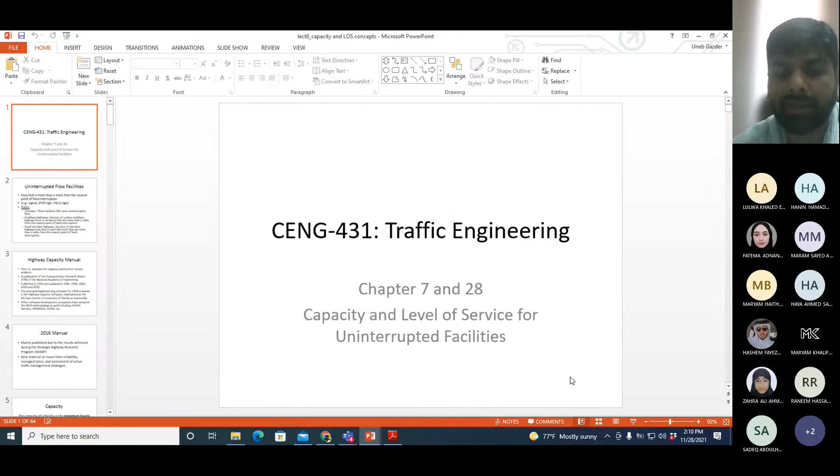Now I will move on to the topic for today, which is capacity and level of service for uninterrupted flow facilities. And this topic is taken from chapter 7 and chapter 28. So we have already defined uninterrupted flow facilities, right? The facilities which do not have fixed interruptions like signals, stop signs, yield signs, and many others as well. Now, if a facility does not have interruptions, you can call it an uninterrupted flow facility without any problem, without any explanation.

But for the purpose of calculations of capacity and level of service, we have imposed a small restriction on this definition. And that restriction is that if the spacing between the interruptions on a facility is more than 2 miles, you can still call it an uninterrupted flow facility. So a highway may have interruptions and may still be called an uninterrupted flow facility, provided the spacing between the interruptions is more than 2 miles. So if signals are more than 2 miles apart, or a signal and the next roundabout are more than 2 miles apart, you can still call it an uninterrupted flow facility.

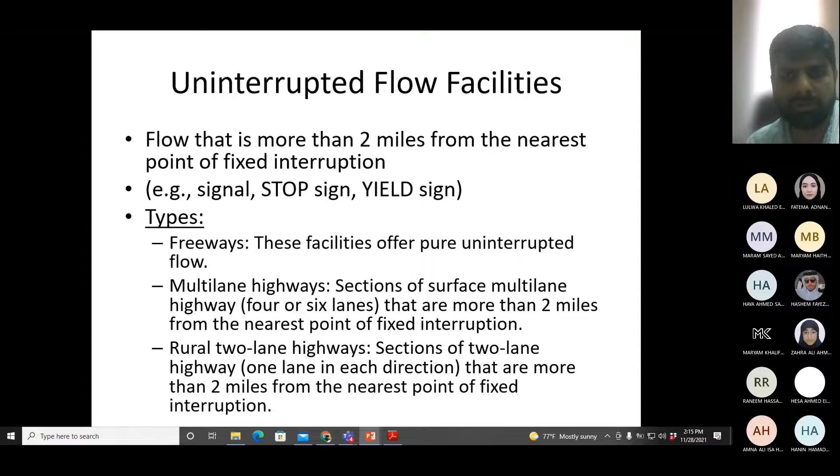But if you come to rural areas, they do not have much population around them. So by default, their traffic is low. So you may have a 2-lane highway in a rural area which is passing through a low population locality, and 2 lanes are enough for them. So even if you make them uninterrupted, they can still be safe.

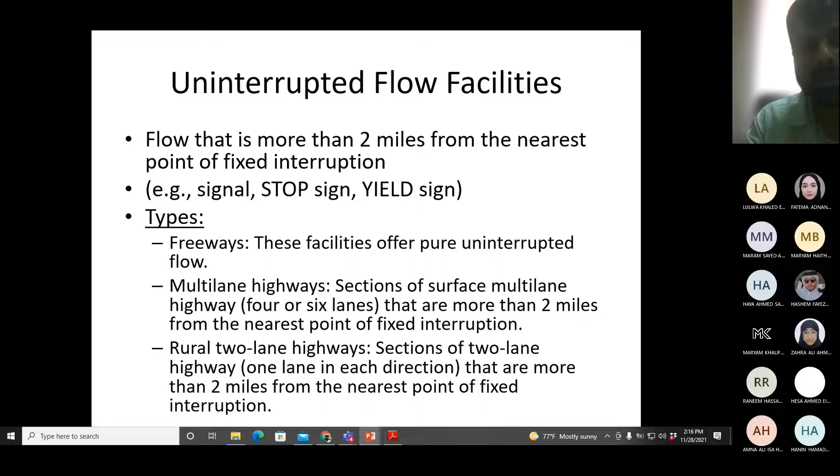So that's why you see with 2-lane highways, rural is mentioned specifically, because urban 2-lane highways will not be safe if you make them uninterrupted. Okay, so just keep in mind that whenever we are saying from here onwards 2-lane highways as uninterrupted, we are referring to rural areas. Because in urban areas, it will either be unsafe or it will not be sufficient for traffic.

Okay, the procedures which we are going to follow for calculation of capacity are taken from the Highway Capacity Manual. This manual gives a US standard for calculation of capacity and level of service, and it is published by the Transportation Research Board, TRB, and this research board works under the National Academy of Engineering, and both these organizations are from the USA. The first manual was published in 1950, and after that, it has gone through many revisions. The latest edition which we have is 2016.

In 1994, they were able to develop a software at the University of Florida which can handle the calculations of the manual. The manual calculations are very complicated, and to do them manually requires a lot of effort, especially if you have to do it repetitively. But in your case, you are stuck with manual calculations for the exam at least. Okay. The name of the software is Highway Capacity Software. It is exclusively designed to do the calculations given in the Highway Capacity Manual.

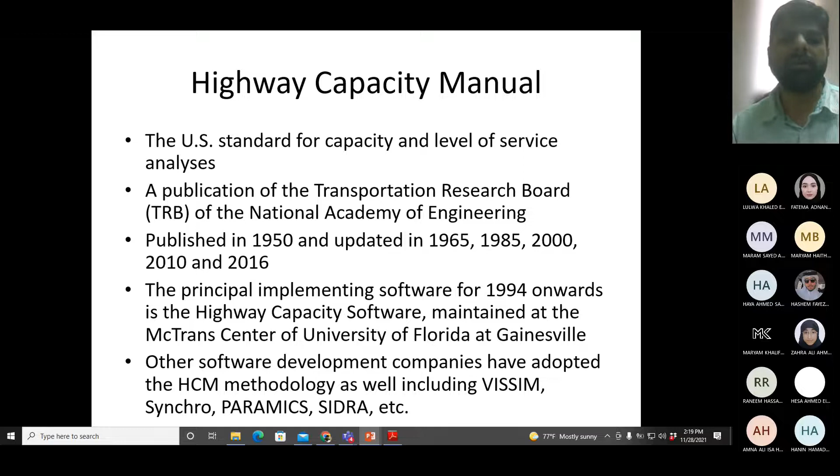So the software which I'm asking you to use for your term project, which I will inshallah explain after we finish this chapter, is also using the Highway Capacity Manual. If you have read the term project guidelines, the software is VISSIM. And there are some other names mentioned as well. They are very popular softwares, SIDRA, Paramics, Synchro, and all of them are using Highway Capacity Manual calculations. So if you are calculating capacity and level of service using any of these softwares in the market, you can be sure that it is as per the Highway Capacity Manual.

Now, the 2016 manual has an interesting story behind it: after publishing the 2010 manual, they started a research program with the name of SHARP. SHARP stands for Strategic Highway Research Program. Under this research program, they were looking to update the old manual without publishing a new one.

But once they finished their research, they found many interesting and new things. So they thought, instead of just publishing a revision to the old manual, we should publish a new manual. This is how they came up with the 2016 manual. Almost all the chapters in that manual have changed; some more, some less. There's a lot of change between the 2010 and 2016 manuals.

The textbook we are using mainly uses the 2010 manual. But the calculations we are doing in class are not so different between 2010 and 2016. Some factors have changed, but not much. The main additions in the 2016 manual were how to calculate the reliability of travel time. Travel time is not reliable, right? So many things affect it.

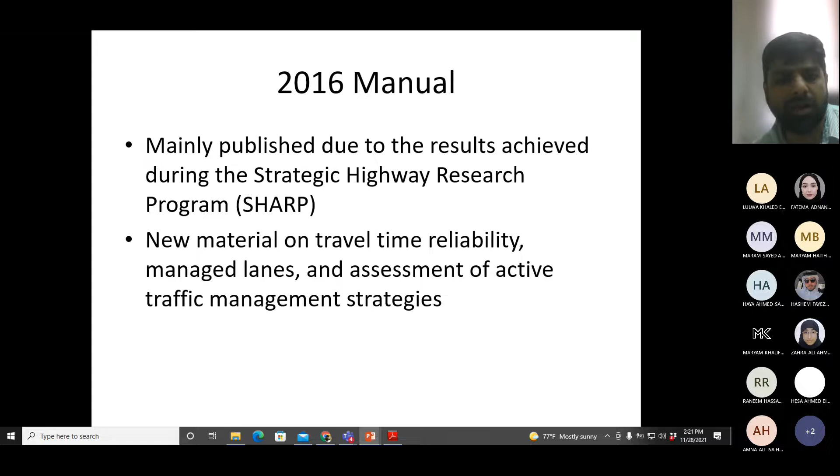An assessment of active traffic management strategies. Active traffic management strategies are those based upon real-time traffic data. Again, something we covered in the last chapter under the heading of ITS, Intelligent Transportation System. ITS gives you real-time traffic information, and you try to manage traffic flow on the basis of that. This is also covered in the 2016 manual.

Now, we already know a very short and brief definition of capacity, which is the maximum flow rate which can pass through a facility in a given time interval. We have used it in calculations in the last chapter and even before that. So this is something we have discussed repeatedly.

Number of persons is for facilities which are not designed specifically for vehicle flow. For example, pedestrian facilities, a pedestrian bridge, a pedestrian crossing; they are not designed for vehicles. Bicycle lanes, public transportation systems, a tram system. All these different types of facilities are also discussed in the Highway Capacity Manual.

So obviously, when you are calculating the capacity of these facilities, you will not calculate it in terms of number of vehicles passing. You will express it in terms of number of persons passing. If you search online for the capacity of different trains, trams or metro systems, you will find them in terms of number of persons per hour.

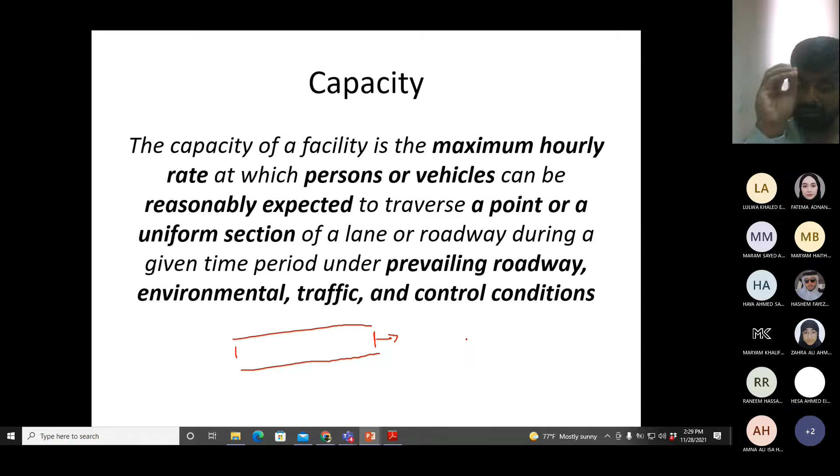So whenever you calculate capacity, you must know these things, and you are calculating capacity under a specific set of these conditions. Capacity under ideal conditions for uninterrupted flow facilities. Ideal conditions will be defined later on, when we go for the calculations.

Speed when the density is zero. Good. Thank you, Asha. Speed when density is zero or almost zero. So in that case, the speed of the facility depends upon what? The design of the road. The speed of the driver. When you don't have any other drivers around you, then your speed will depend upon the design of the road.

So this free flow speed is an indication of the design of the road. Okay. So when free flow speed is higher, that means design is better. So capacity will also be higher. Okay. You can see when free flow speed decreases, the capacity also decreases. Okay.

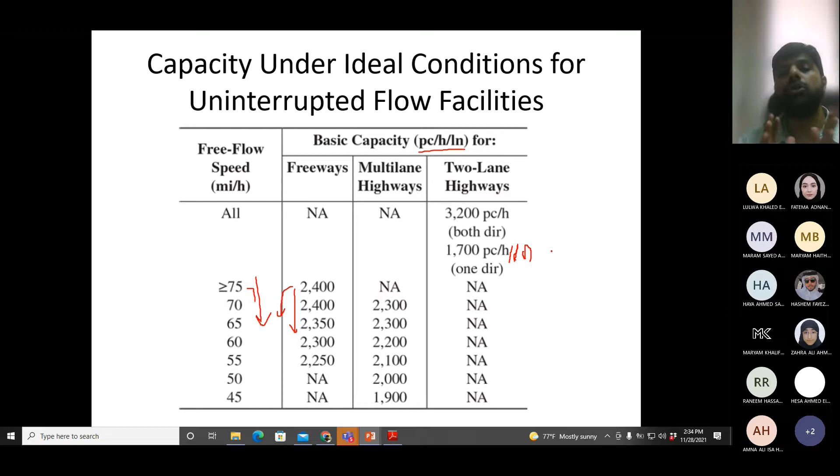Okay, so that's why if one of the two directions achieves a flow of 1,700, then the other direction can only achieve up to 1,500. Okay, so 1,700 plus 1,500 is 3,200. So this is the distribution then. Capacity is not equally distributed for two-lane highways. One direction has to have more than the other because that one direction will decrease the flow in the other direction. Okay, so when one direction is 1,700, the other direction can only go up to 1,500. Okay, and it does not depend upon the speed.

Now let us come to the concept of LOS. LOS stands for level of service. So what is level of service? Basically, it's a scale which shows the operating quality of traffic flow. Now, up till now, we know two traffic flow conditions, which we have discussed in almost all the chapters. We know free flow, which you have just defined, that when density is 0, that is free flow conditions. The other thing which we know is capacity.

Now, if I ask you regarding the quality of traffic flow when the highway is at capacity, is it good or bad for the driver? If the highway is at capacity, is it a good traffic flow condition for the driver or bad? Tell me.

If you come to a highway as a driver and the highway is at capacity, is it good for you as a driver? Will you feel good in that condition of traffic or not? Tell me. Not good, bad, okay, bad. Not good is bad, right? Okay, it's bad. I agree with you, it's bad. And so

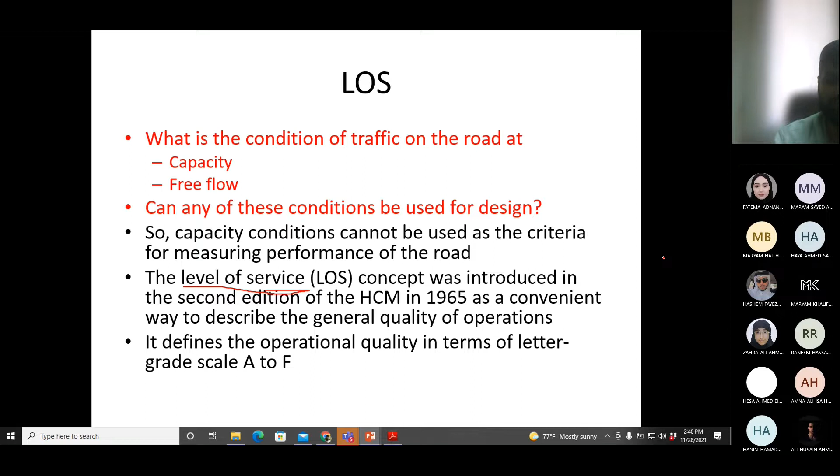So the level of service was introduced so that you can have intermediate levels of traffic flow conditions apart from capacity and free flow. So level of service definitions as per the 1965 and 2000 manual, which they have not changed in the new manual as well. It describes level of service as operating conditions of a lane or roadway under given volume. So what is the traffic flow condition under given volume for a lane or a roadway?

Okay, it is a qualitative measure. Why am I saying it is qualitative? Because I'm giving it a grade, not a number. Okay, so we have qualitative and quantitative measures. Capacity is quantitative because capacity has a number, 1800, 1900. This is quantitative. Grade or level of service is qualitative because it's a grade, it's a letter.

And it describes the operational conditions of the traffic stream, and it depends upon service measures including speed, travel time, freedom to maneuver, traffic interruptions, comfort and convenience of the driver. So when you calculate level of service, directly or indirectly, you are covering all these aspects of traffic flow. Some of them will be used directly, like speed or traffic interruptions, and some of them are indirectly included in the calculations, so you will not see me calculating comfort or convenience, but they are part of the concept.

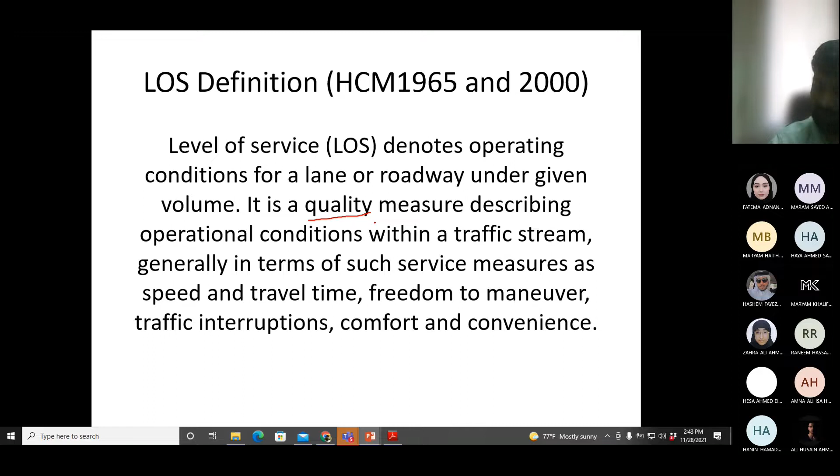And if I have a lower level of service, for example E or F, that means my speed is very low, maybe zero. My travel time is very high. I have very little freedom to maneuver. Traffic interruptions are very high, and I'm feeling less comfortable and convenient on the road. So when you give me a level of service, I can comment on all these things, that this particular measure would be high or low and so on.

So over capacity, right? Over capacity; in the previous chapters, we have called it oversaturation as well. For intersections, we called it queue buildup condition. So all these are different names which we have given to the condition of level of service F. Level of service F is not discussed for calculations, because in level of service F, you already have queue and traffic jam. No calculations are possible. So you will see most of the calculations go up to level of service E. So level of service E means capacity.

Level of service D means maximum sustainable flow. Sustainable means continuous. So the cars are moving continuously in level of service D. The maximum flow which you can have continuously on the highway, that will be for level of service D. In capacity condition, the traffic flow is still there, but it is not continuous. Maybe after every few minutes, you will see the flow stopping for a few seconds. Most of the time it is moving, but at capacity there are small starts and stops. So this is how we define level of service D, where the flow is not stopping; it's moving continuously at a very low speed, but still moving.

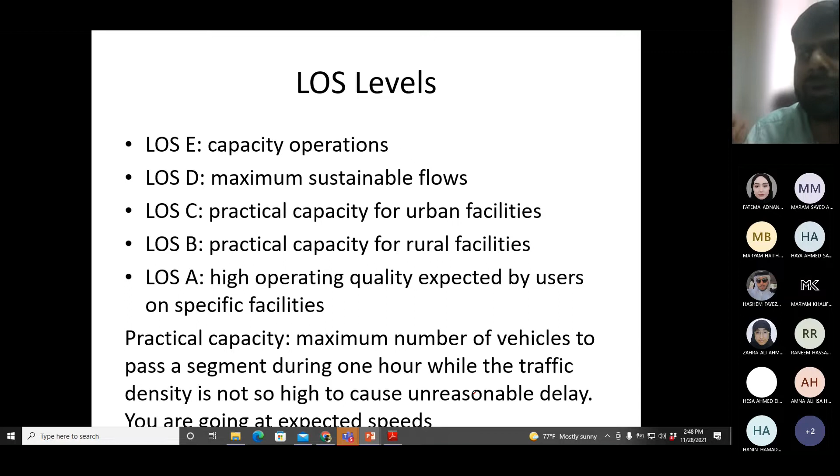So practical capacity is that value up to which drivers are not affected by other drivers in terms of their speed. That is practical capacity. So you are still maintaining a speed which is close to the free flow speed of the facility. So you don't feel that you are getting delayed because of other drivers. This is level of service B or C.

Okay, service measures, the measures which you use primarily for calculating level of service. The main variable, the main parameter which you use for calculating level of service. So if you talk about interrupted flow facilities and you are talking about an urban street, then the level of service depends upon average travel speed on that street. We will not discuss it in the course, but just a point to be noted.

Then for other interrupted flow facilities, for example, signals, stop signs, roundabouts, ramps, the level of service depends upon control delay, and control delay is something which we discussed in lecture number 6. I gave you the complete definition. I think you should know it because you would be preparing for the exam.

Then for uninterrupted flow facilities, for multi-lane highways and freeways, level of service mainly depends upon the density of vehicles. For two-lane highways, the level of service depends upon percentage time spent following, which we will discuss in the next chapter, so I will describe it in detail there. And it also depends upon the average travel speed. So for two-lane highways, it depends upon time spent following and average travel speed. For other uninterrupted flow facilities, level of service depends upon their traffic density.

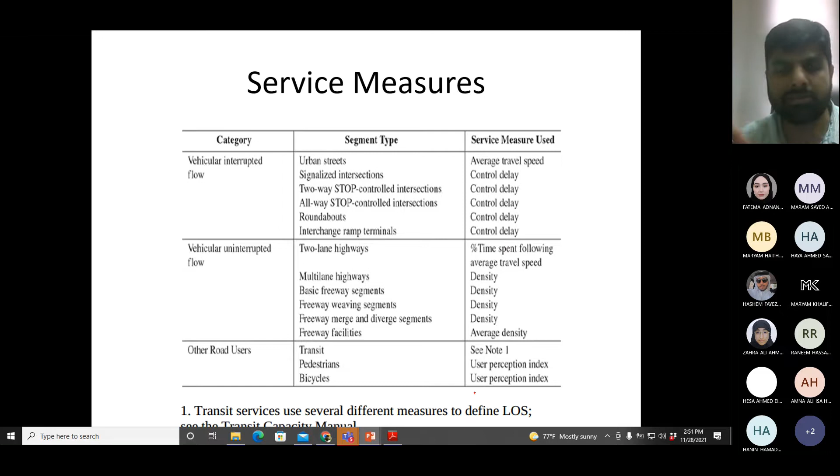And he will tell you, according to his perception, whether he feels that level of service is A or B or C or D or E or F. Okay, so for bicyclists and pedestrians, the level of service calculation is not there. We just ask the users and then we calculate the average value, and that's it.

Okay, the last thing which I will cover today is service flow rate. If you look at the definition of service flow rate, it is exactly the same as the definition of capacity with the addition of one term. The term is: while maintaining a particular level of service. So it is the maximum flow rate you can have on a roadway or a lane under prevailing conditions while maintaining a particular level of service.

Now, if you are saying my level of service on the road is A, that means the flow rate on the road is less than or equal to service flow rate of A. Similarly, if you are saying the level of service on the road is B, that means the flow rate on the road is more than service flow rate of A, and less than or equal to service flow rate of B. So for every level of service, a service flow rate is mentioned, from A till F.